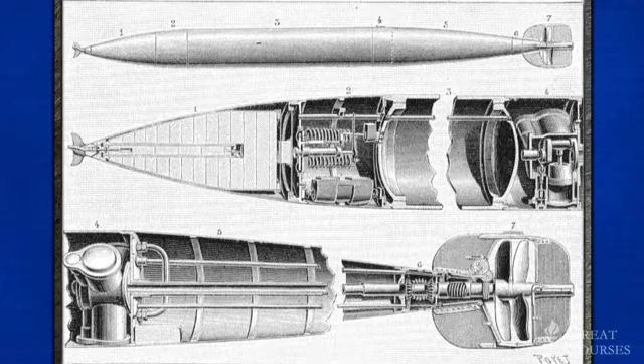Believe it or not, the first modern robot was a weapon, the torpedo. Delivered by its inventor Robert Whitehead to the Austrian military in 1866, the Whitehead torpedo was a self-propelled underwater bomb that could maintain its depth using a mechanical pressure sensor.

Even before Whitehead, back in the 19th century, Sir George Cayley, an engineer, had examined the curved wings of birds and tapered shapes of dolphins and trout, and seen in them the designs animals had in nature in order to minimize mechanical resistance. While Cayley invented the first glider to carry a human aloft in the 19th century, having correctly identified the aerodynamic forces of lift, drag, weight, and thrust, we also know today that when we see a torpedo-shaped body in a robot, it is built that way on purpose, for streamlining.

Torpedo-shaped bodies are built to go fast and straight, and by the turn of the 20th century, the torpedo's inventor Whitehead had added a gyroscope to stabilize his mechanical beast's headings. Motions guided by sensors are at the heart of autonomous robotics, and the success of the fully autonomous robot known as a torpedo has led to its widespread and lasting use.

To this day, military robots lead the pack in terms of innovations in robotics. As both Cayley and Whitehead glimpsed, years ahead of their time, military robots have to be customized to operate in the air, on and under the sea, and even in space. That's partly because robots designed for war must operate in a staggering array of workplaces and carry out a multitude of tasks.

A very brief list of robotic missions in the 21st century military would include the following: hazards investigation, route clearing, mine detection, vehicle inspections, explosive ordnance and bomb disposal, emergency response, carrying supplies and people, patrol, search and rescue, communications and electronic warfare, and defensive and offensive ops. But military robots have to be customized for another reason too.

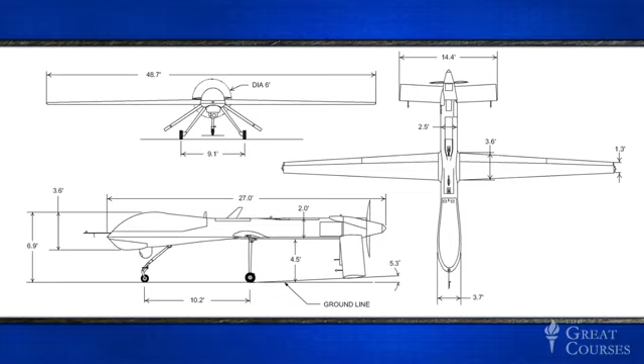The original Predator unmanned aerial vehicle was of modest dimensions, sporting a fuselage length of 27 feet and a wingspan of 48 feet. It's an old-fashioned, propeller-driven plane. The Predator was first flown in 1994 and entered production in 1997. The Predator and its weaponized descendants, the Reaper and the Avenger, have served the U.S. Air Force, U.S. Navy, U.S. government, and a host of other countries.

Predators are technically considered to be part of an unmanned aerial system because they are remotely operated with humans in the control loop. The robot does all of the autopilot work, navigation, flight control. The humans exercise high-level control of goals and decision-making. Here you can see two members of the U.S. Air Force closing the control loop in a Predator unmanned aerial system.

The year is 2007. The place, Iraq. The Predator has just taken off and they are performing a series of in-flight equipment checks. Captain Cole on the left is the pilot. Airman Oilo on the right is the operator of the Predator's sensors. Their job is to work with the Predator while it's within a 25-mile radius of the base so they can recall it if they detect any problems.

If the Predator checks out, then they'll do something that at first blush seems crazy. They'll hand over the control to a different set of Air Force operators who are sitting in Nevada. So two things make this handoff possible. First, communications to and from the Predator are handled indirectly via satellite. Unlike regular radio control operations, control via satellite allows communications over the horizon, out of the line of sight.

Second, navigation anywhere in the air is made possible by the Global Positioning System, which we know as GPS. GPS was created by the U.S. military for aerial, water surface, and ground vehicles, both manned and unmanned. In robotics, navigation is one of the most fundamental problems that any mobile robot has to solve. You have to know where you are in order to get where you want to go. GPS works as a system of navigational beacons that can be used to calculate your position.

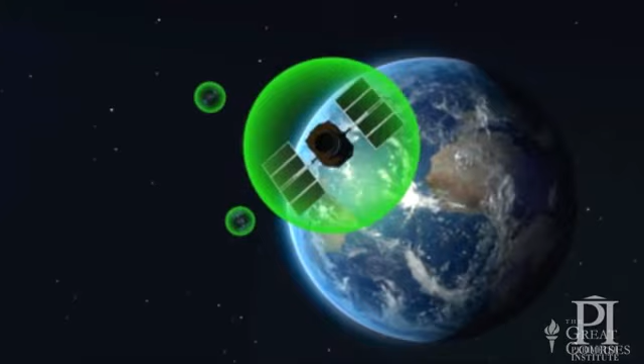The current GPS system is a network of 29 Earth-orbiting satellites. The robot needs the ranges and locations of 4 of those satellites to calculate its position using a process called trilateration. Trilateration involves the simple geometry of overlapping circles in the two-dimensional case, or the slightly more complicated geometry of intersecting spheres in the three-dimensional case.

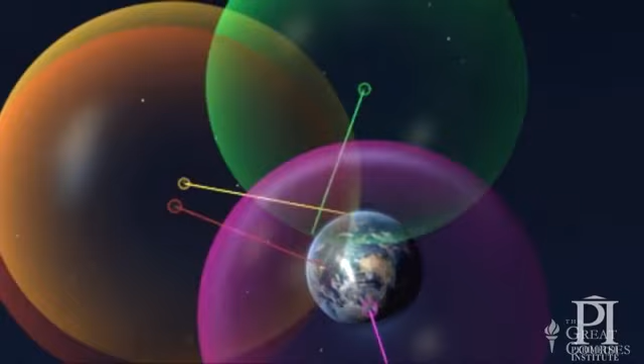What makes accurate navigation particularly important to unmanned military robots like the Predator is that they can remain on remote station for over 24 hours. If the unmanned aerial vehicle were trying to navigate by dead reckoning, errors in estimating position would increase with time and distance. Navigation does not present a problem for other types of military robots as long as they operate in sight, performing jobs in close proximity to the soldier in front of them.

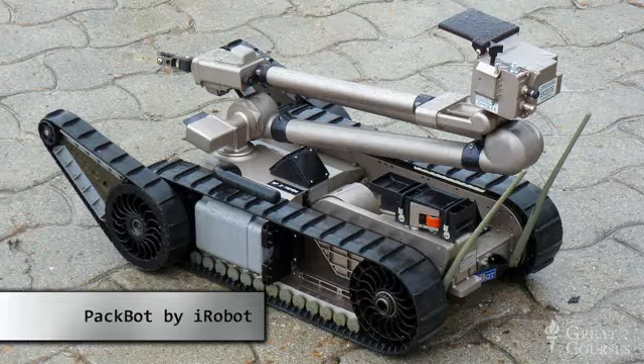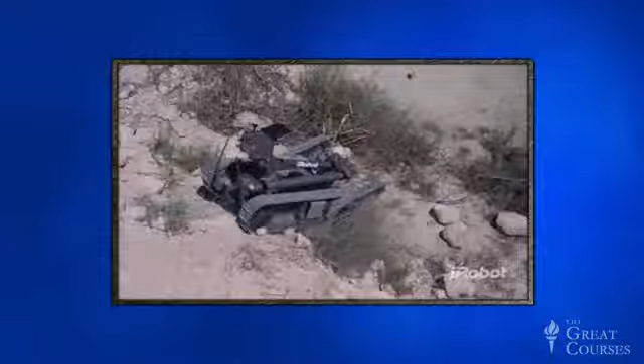PackBot, created and produced by iRobot, is a class of small, mobile, remote-controlled robots with partial autonomy that have been customized for a variety of different tasks in close proximity to the operator. They are built to dispose of bombs and improvised explosives, provide situational awareness to first responders, aid search and rescue, collect video and air samples in hazard responses, and detect and localize snipers. In each of these tasks, PackBot increases the standoff distance between a human soldier and the potential threat.

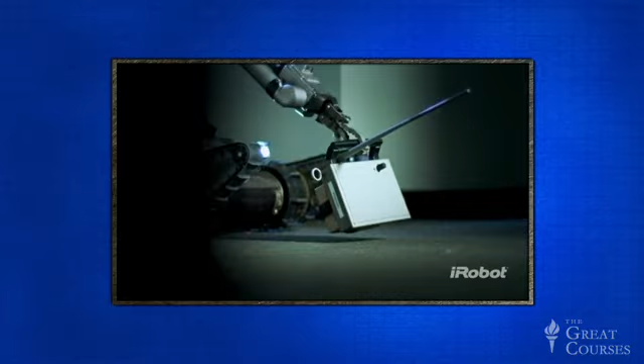As a stand-in for the soldier, PackBot allows operators to have virtual presence and virtual agency. Virtual presence is made possible primarily by the cameras and microphone that PackBot can carry. It can also be outfitted with other sensors depending on its particular task. Virtual agency is made possible by the ability of the soldier to control the movements of PackBot using a video game-style controller. Virtual presence lets the operator perceive the world from the robot's point of view. Virtual agency lets the operator act in the world as the robot.

One fundamental principle of robotics is that perception and action depend on each other. Is that object a brick or a case that might contain a bomb? Move closer. Maneuver the arm holding a camera to the side. These are actions that create new perceptions. Is the path clear straight ahead for movement? This is a perception that is necessary for the desired action. To get PackBot working for you in the field, it has to be deployed first.

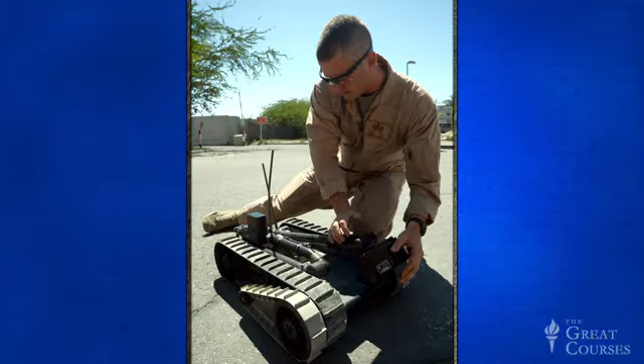Man-portable and weighing only 24 pounds without the battery, PackBot can be carried easily by a human and then deployed in 2 minutes. It can be operated up to a range of 1,000 feet via two-way digital radio communications.

So a challenge of battlefield situations is terrestrial locomotion. Rubble, uneven terrain, water, mud, and tight spaces often bar access to wheeled vehicles. Wheels that fall into cracks or get stuck in loose sediments can permit the chassis to get hung up and stop the robot dead in its tracks. To avoid that problem, PackBot uses tank tracks.

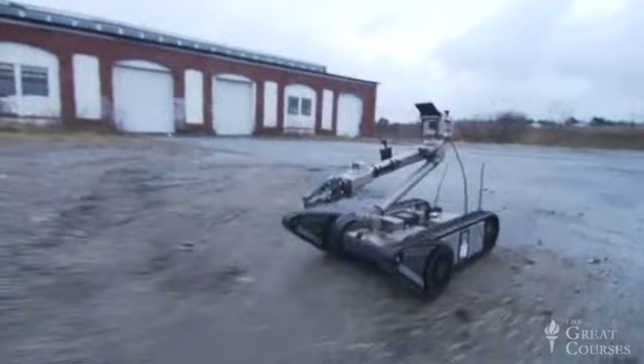Because the chassis of PackBot is relatively small, just 7 inches in height, tracks alone would not permit it to move upstairs. Yet it climbs stairs easily thanks to an innovative set of actuators called flippers. These flippers, which have motorized tracks, are mounted collinearly with the axles of the frontmost wheels.

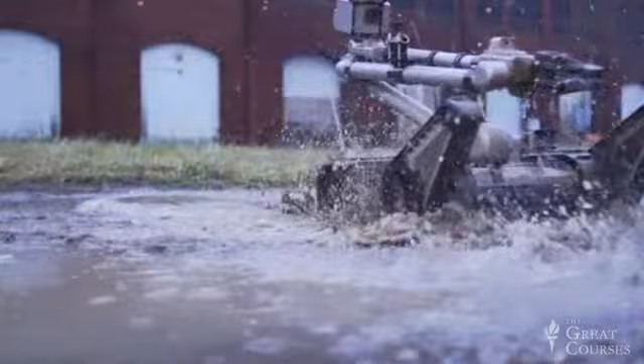Operated separately from the chassis' main track actuation system, the 8-inch flippers can be rotated 360 degrees, adjusted into positions that allow the flipper to serve as a motorized ramp, or rotated to help lever PackBot over obstacles. The flippers can also be used to prop up the front of the robot to increase its height for reaching and inspection. As a highly maneuverable mobile robot, PackBot can take tools and sensors into dangerous situations.

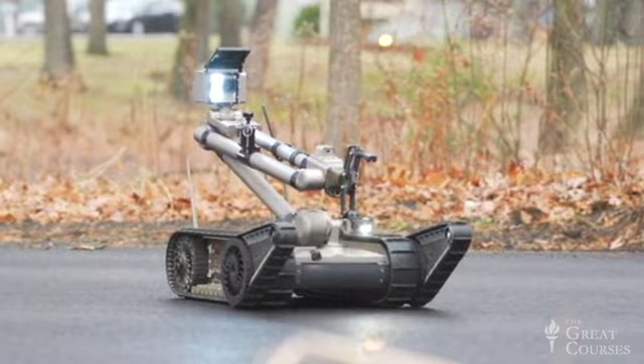To carry sensors and end effectors, PackBot can be installed with a manipulator, an arm with 8 independent degrees of freedom. If you use PackBot to inspect a building for threats, 2 problems can undermine your mission. First, you may lose the ability to navigate effectively because you're disoriented in the remote frame of reference of the robot. Second, you may lose communications because of electrical noise, distance, or obstruction. Both of these problems tend to arise when PackBot is no longer in your sight. Here's where the partial autonomy of PackBot becomes very important.

In any navigational task, being able to hold a heading is paramount, allowing you to make progress towards a waypoint. PackBot allows the operator to select a heading, and then PackBot will hold that heading for you, even as it moves over uneven terrain. So this allows the operator, who's looking through cameras that experience all the bumps and jostling, to be certain of the robot's course.

Heading hold is made possible indoors by the use of a compass and an algorithm based on negative feedback control. The difference between the selected heading and the actual heading in negative feedback control is constantly calculated by the software controller. That difference is called the error, and the goal of the controller is to adjust the heading to minimize the error, ideally maintaining the desired heading without error.

But what happens when the communication link is lost? Is PackBot lost too? Not necessarily. PackBot first initiates retro-traverse, which is a fancy name for retracing your steps, or tracks in this case. Because the chassis contains a compass, GPS, and an accelerometer, it can keep track of how far it has gone on any series of headings. Then it can backtrack until the communications link is reestablished.

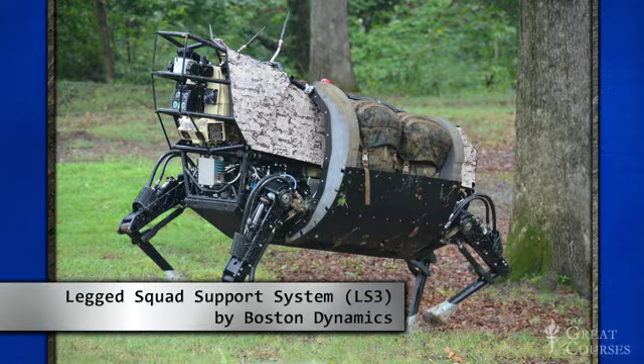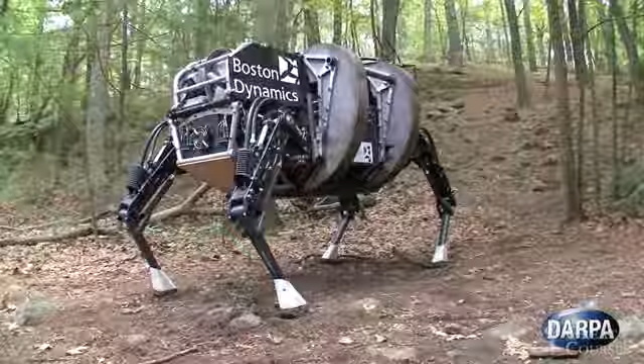The Legged Squad Support System, LS3, is basically a robotic pack horse. Built in conjunction with DARPA by Boston Dynamics, which was purchased by Google, LS3 is the size of a horse. This 4-legged robot can carry 400 pounds and, most importantly, can do so over rough terrain. Because the design of LS3 is inspired by animals, we talk about it having a biomorphic body plan.

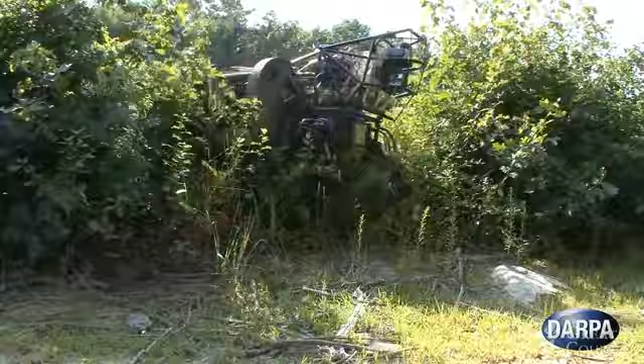If we had LS3 helping us at home to carry firewood, groceries, or dirty dishes, we'd call it a personal service robot, right? The concept of a service robot conveys the idea that LS3 works in and around its operators, helps with designated tasks, doesn't bear weapons, and is not intended to operate autonomously.

Now, what sets LS3 apart from personal service robots intended for the home is that it is large, loud, bearing a gas engine, and extremely robust in the face of challenging outdoor environments and perturbations like weather and loss of balance. These are the kinds of features we have in mind when we talk about a robot being hardened for military use. LS3 is partially autonomous in addition to being hardened for military use. It responds to basic voice commands such as engine on and stop.

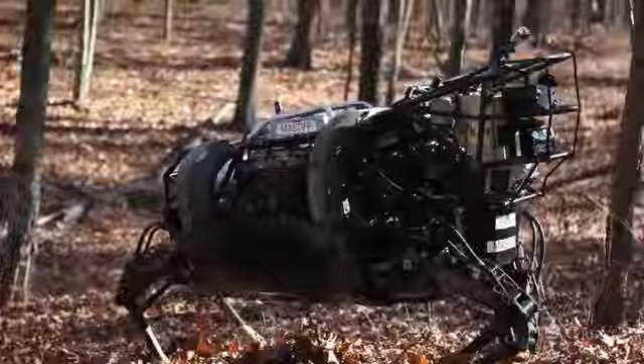When commanded to follow tight, LS3 will kick into autonomous mode and follow the human in front of it. What's really impressive about LS3 are its actuators for movements, its legs. LS3 is the descendant of Big Dog, and Big Dog was a breakthrough in legged robots.

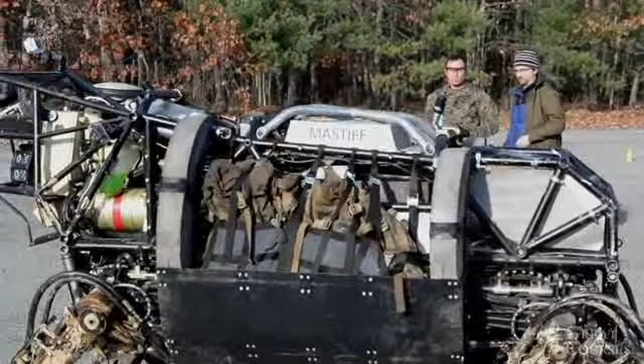Until Big Dog, most legged robots were either upright humanoids with 2 legs or sprawling 6-legged insectoids. With 4 legs, Big Dog is more stable than a humanoid and able to carry heavier loads. With an upright mammalian posture, Big Dog has better clearance than an insect body form.

The problem with using a dog or any mammal for a robot design is that they are unstable. You can't stand up passively; fall asleep standing up, and you fall down. To solve this problem, engineers led by Martin Buehler had to create a robot with dynamic stability. You can see how dynamic stability works because Big Dog is almost always moving its legs, even if it's standing still. It's sort of ironic, isn't it?

But that's the trick. If you are always moving, then you are actively keeping your center of mass balanced between your legs. Now, dynamic stability is costly in 2 ways. First, it takes energy to always be moving your legs. And second, it takes a lot of sensing to do that balancing act. 50 sensors are needed to track the acceleration and tilt of the body, the position and force on the joints, and the velocity and attitude of the body.

In many ways, Big Dog and LS3 epitomize bio-inspired design in robotics. Working from the anatomy and physiology of trotting mammals, engineers worked backwards from nature, identified the key functional principles, and then built machines that worked in the same way. The design of a robot's body then depends on its task and the workplace in which it is conducting that task. For novel tasks, roboticists often look to nature for ideas, as they did with Big Dog.

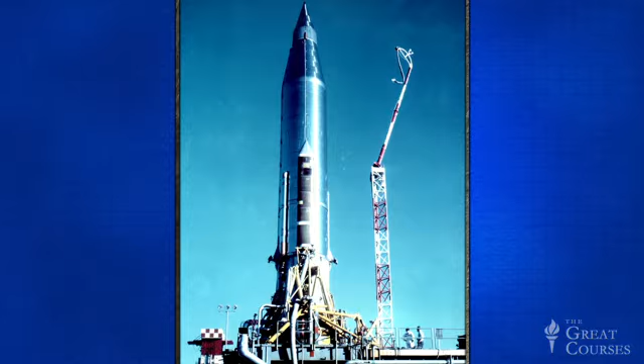When we think about inspiration from nature, there are some very surprising robots that have been built based on those principles. The streamlining that we see in dolphins and porpoises has affected a whole range of torpedo-shaped things, not only torpedoes in the water, but, for example, long-range ballistic missiles. The first long-range ballistic missile was the V-2 rocket. The V-2 was created by the Germans in World War II and was used against the Allies, most notably the civilian population in southeast England.

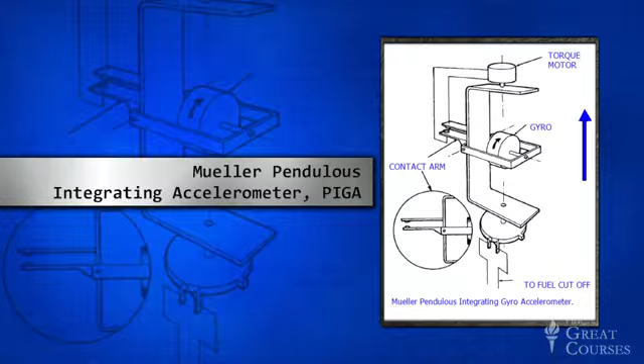Just like Whitehead's torpedo, the V-2 is a robot in the sense that it operates on the principle of sensor-guided movements. The German engineers built an automated controller for guidance based on a gyroscope and a pendulum: the Mueller Pendulous Integrating Accelerometer, or PIGA, thankfully, for short. Gyroscopes, what useful sensors they end up being. Now recall that we first encountered gyroscopes as the main component of the autopilot created by Elmer Sperry when he was building that aerial torpedo out of an airplane.

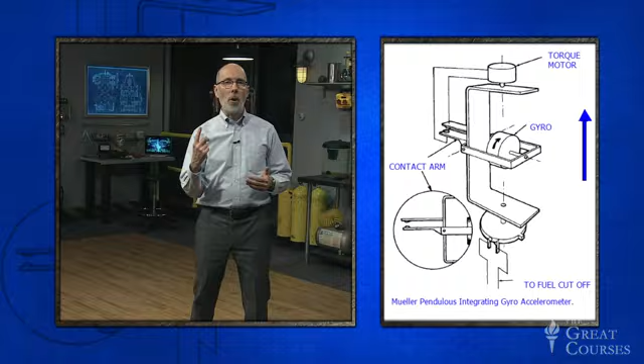The difference between Sperry's airplane and the V-2 is the required speed and accuracy of the gyroscopic response. Because the V-2 was traveling at speeds faster than sound, it needed to react quickly and accurately. A PIGA takes advantage of the fact that the torque from a spinning gyroscope can counterbalance torques that attempt to rotate the gyroscope in a different direction. In the PIGA, the pendulum would tilt its top arm to the right if the gyroscope weren't spinning.

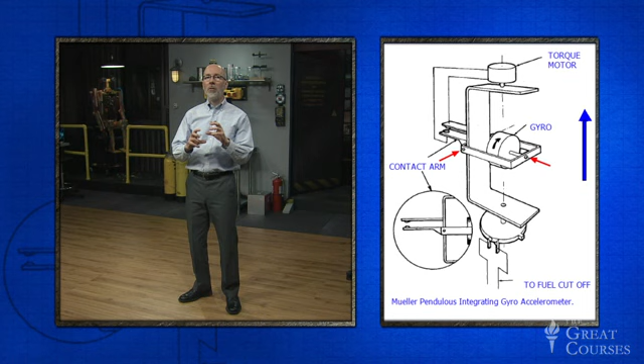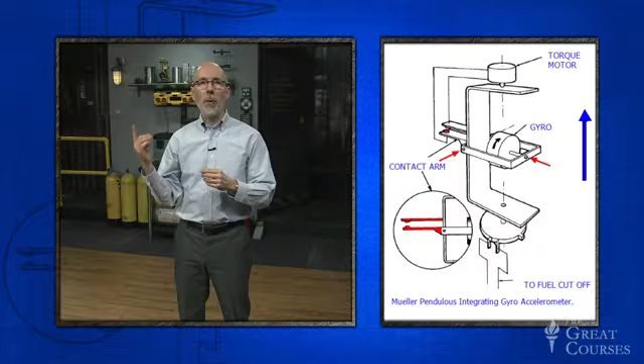In flight, this PIGA is mounted so that neither the axis of the pendulum nor the axis of the gyroscope are aligned in the direction of motion. So as the V-2 rocket accelerates forward, the pendulum tips downward, causing the electrical contacts to close a sensor switch. That switch turns on the torque motor up on top, which then rotates the whole system until the gyroscope's precession is able to switch the torque motor off. Now, what the PIGA senses is both the magnitude of the acceleration and the speed of the V-2 rocket in that direction.

If you know your acceleration and your speed and how long you are moving at that speed, and your angle of takeoff also, then you can calculate where you're going to land using the simple physics of thrown balls and other objects called ballistics. You can go ballistic. Hence, a ballistic missile throws itself to hit a target. From a range of 100 miles or more, the V-2 could hit within 600 meters of its target. That's a measure of its functional accuracy.

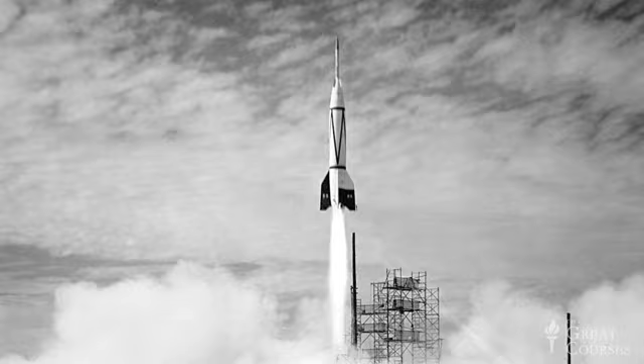After World War II, the US and Soviet Union captured as much of this V-2 technology as they could. The V-2 jump-started our own ballistic missile programs and space programs. The first rocket launch from Cape Canaveral, Florida took place in 1950. For its inertial guidance, America's modified V-2 rocket, called a Bumper 8, carried a set of PIGAs that had improved accuracy. The basic design of the PIGA sensors worked so well, in fact, that many of the most famous rockets carried them, including the Saturn rockets that took humans to the moon.

Because of their accuracy, PIGA sensors allowed the V-2 rocket to be independent of human control once the rocket was launched. Simple mission, simple environment, and independence from humans thanks to an accurate controller.

Fully autonomous robotic systems have also been developed for defensive actions as well as offensive ones. And let me introduce you to a very important unmanned system used by the Navy since 1980. The Phalanx Mark 15, a close-in weapons system. The task of Phalanx is more complex than that of a V-2. It's not just to launch and land an explosive device.

Phalanx has to detect, evaluate, track, and then engage targets that are rapidly moving and attempting to destroy the Phalanx's ship. The task of the Phalanx is to be the last line of defense against anti-ship missiles and high-speed aircraft. This is a do-or-die situation in which both speed and accuracy are critical.

The environment of Phalanx is likewise much more complex than that of a V-2. It's not just the air, but objects in the air and objects on the water. And keep in mind that there are other ships in your own fleet here too, so the environment is mixed with friends and foes, sometimes intermingled. Now, what about human independence?

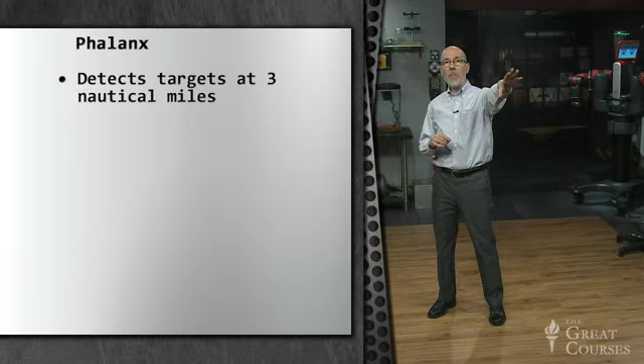In battle stations, the operator normally places the Phalanx in its autonomous mode, so it is actively using its radar to detect incoming targets. Because the Phalanx is built as a last line of defense, it has very little time to react. For example, it detects targets at a range of 3 nautical miles, can acquire those targets at 2.3 miles, and engages those targets at 1 nautical mile. If the target is a cruise missile, a human operator wouldn't even have time to hit the on switch.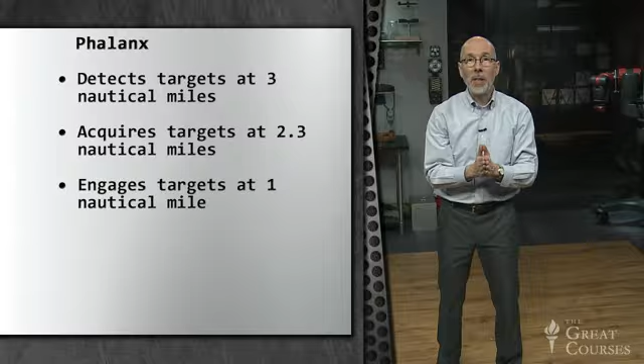Because of the need for speed, the Phalanx needs a high degree of autonomy from humans. Under most battle conditions, the job of the human operator is to hit a hold fire button, if so ordered by the fire control command. The primary sensor systems of Phalanx are 2 radars. It has a wide view detection radar, and a narrow scope radar that focuses on the target once it has been acquired.

Before Phalanx engages a target, it has to answer these questions. Is the target approaching the ship? And if the target is not directly approaching the ship, can it maneuver to hit the ship? If it is approaching the ship or can maneuver to hit the ship, is the target's velocity within the range that Phalanx can operate? These questions are answered by calculating the heading and the course of the target over time.

Knowing the heading and speed of the ship, too, the computer controller of the Phalanx can calculate if the two paths will intersect at the same time. Changes in heading of the target indicate its ability to maneuver. Finally, changes in position over time indicate the target velocity.

Once Phalanx fires on a target, it uses its focused radar to track its own projectiles relative to the target. And using good old negative feedback control, Phalanx then makes adjustments to narrow the distance between the actual and desired trajectory of its projectiles as it continues to fire. Phalanx can make these adjustments much more quickly and accurately than a human operator can.